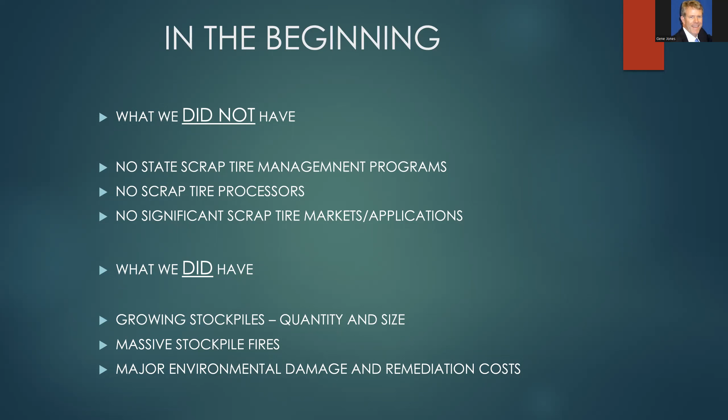So when we had the fires, that prompted Minnesota to develop the first scrap tire management program, and they banned scrap tires from disposal in stockpiles. Smart move on Minnesota's part. But then Minnesota's tires were transported across the border into neighboring Wisconsin, into massive stockpiles that then had fires. So Wisconsin then banned stockpiles. I think you're getting a feeling for the gradual progression. Everybody basically had to initiate waste tire management programs in self-defense. Next slide, please.

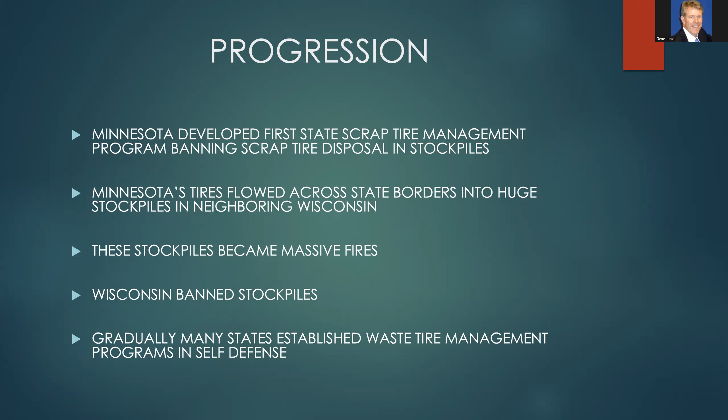So that led to Florida developing a program. They started in 1987, and they didn't just try to do something quickly. They carefully evaluated objectives, components, and the experience, good and bad, of others. It was during that gathering that Jan Clark contacted me because we had experience in waste recovery, we saw what other states were doing, and we could give her a feeling for what impact it would have on processors and being able to encourage them.

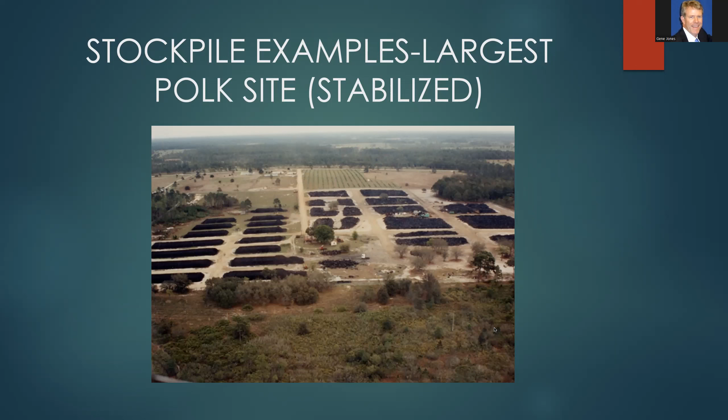And this site was particularly problematic because it sat right on sandy soil right above a major aquifer recharge zone. And if the fire created pyrolytic oils that went down through the sand and into that aquifer, the impact on Florida could be substantial. Next slide, please. So big piles, little piles, spread all over the place. Next slide, please.

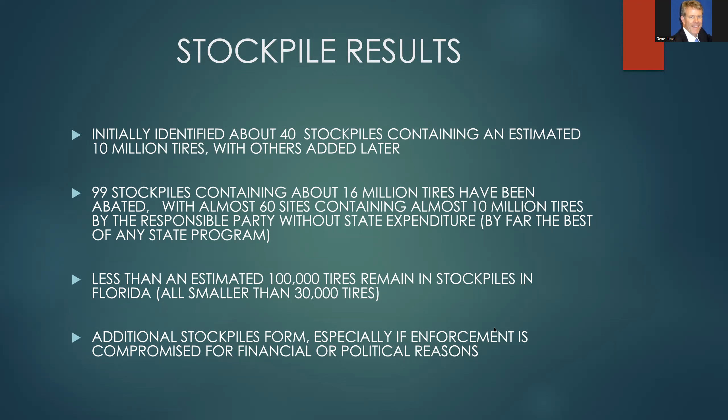So the next thing that Florida had to do was you had to deal with the stockpiles, then you had to manage ongoing generations so that you didn't create more stockpiles. And Hope dealt with some of these things, but I'll just go through them quickly. Critical parts were to register or permit all segments of the tire handling chain, from tire stores to haulers to processors to disposal sites. Established operating parameters and monitored conformance, a continuing battle. And the important part was they enforced violation penalties. Some people even went to jail.

And equipment was seized. The whole rule was tied to the litter control rule that had the provisions in it allowing seizure of equipment. So it's one thing for a person hauling tires in their pickup to dump them when they might get their wrist slapped, but if somebody was going to take away their truck, that got their attention. The objective was to minimize stockpiles by increasing the probability of being caught with good oversight and having penalties greater than the savings that the person would achieve by violating the law. Florida has a good history, but budget and experienced manpower limitations can be a challenge.

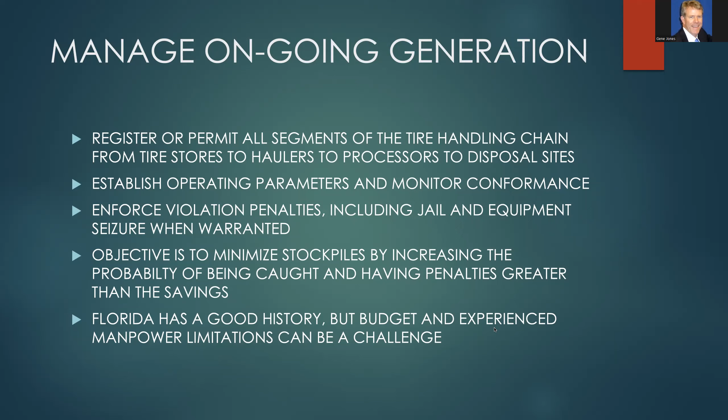Florida did some things in its initial program development that were really wise. One of them was they required tires to be cut into at least 8 roughly equal pieces or shredded prior to landfill disposal. Now that reduced the volume and it improved landfill space utilization, but a side effect of it was that it increased the cost associated with disposal and increased the driving force to create markets.

Florida also used grants to counties. At the beginning, they gave grants to all counties, large and small. It's evolved now into only going to small counties. But they were used to promote applications like playground cover and product purchases. And they even set up a mechanism so that the state reviewed some of these products, approved them, and made them easier for the county to purchase. There were a lot of phantoms out there and scams. Florida recognized that markets had to be diverse, and it developed a strategy to encourage these multiple markets. They've had an outstanding success rate, but markets change constantly and require continuing development.

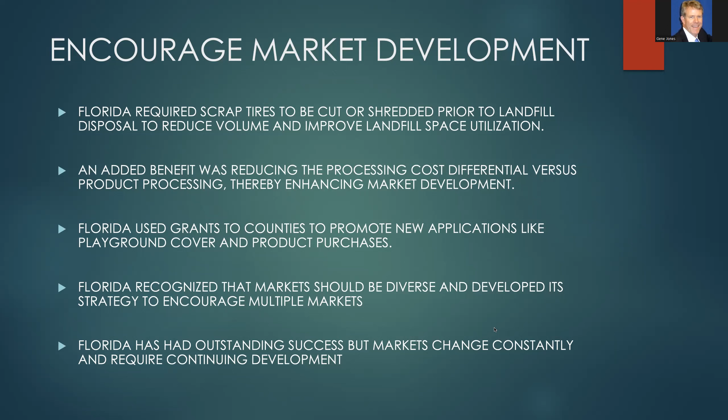So I'm going to go through these market segments briefly, and in following sessions, you'll hear more about it from the panels. So I'm only going to go very quick. TDF for years was the largest market. It's the market we worked to develop in waste recovery because it was large and didn't require particularly sophisticated processing, at least compared to crumb rubber and some of the others. And TDF offers environmental and operational advantages versus coal, including lower greenhouse gas generation, and it has a renewable resource component from the natural rubber that's in it. And there's less landfill usage because it has a lower ash content than most coal. So that's the end of the ad for TDF, but it is a very good fuel. It's not a forced fit.

So major usage in Florida includes multiple cement kilns. Their usage depends on market and operating conditions. As John mentioned earlier, sometimes when the business climate is strong and construction is strong, they optimize production, and that requires them to just focus. They want to simplify things, and they simplify their fuel mix as part of that.

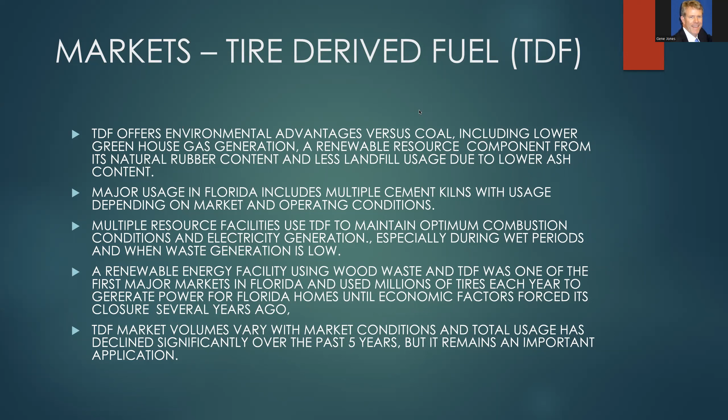Rubber modified asphalt is a term that, if you've worked with scrap tires at all, has been heralded as what was going to use all of the tires, going all the way back to ISTEA, the Intermodal Surface Transportation Efficiency Act of 1991, which was going to require the use of rubber in all highways in the whole world, or at least in the United States. But Florida has used more rubber modified asphalt than any other state except California and possibly Arizona. It pioneered terminal blending along with Mike Rouse and some really good people in Florida DOT. They developed this technology that has since been broadly used across the country.

Florida DOT is the only state to specify rubber modified asphalt in all high traffic road maintenance for many years. At its peak, RMA consumed about 10% of the waste tires generated in Florida. However, styrene block polymers, primary products produced by major companies, have come in and displaced rubber modified asphalt in Florida. So there's virtually no usage. However, there's some new dry process technology, two variations of it, that are now being demonstrated around the country, and they have the chance of rejuvenating this market by offering lower price and similar performance, and be able to compete effectively against the block polymers. Next slide, please.

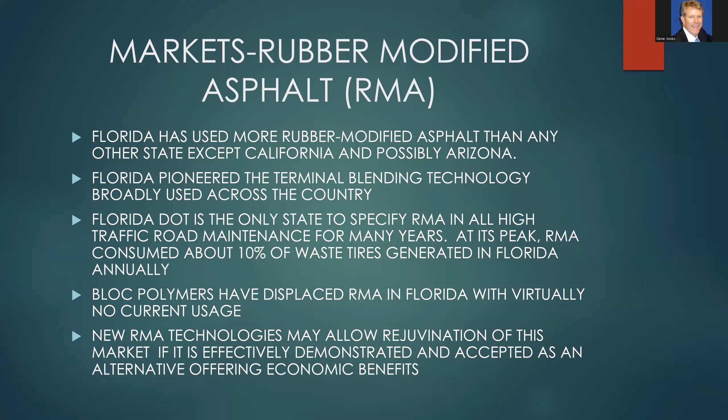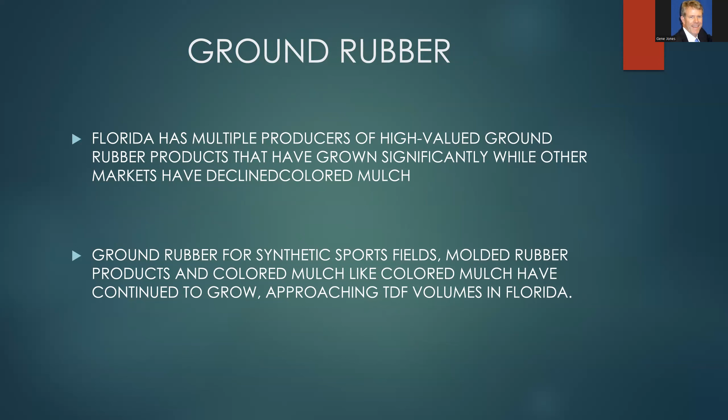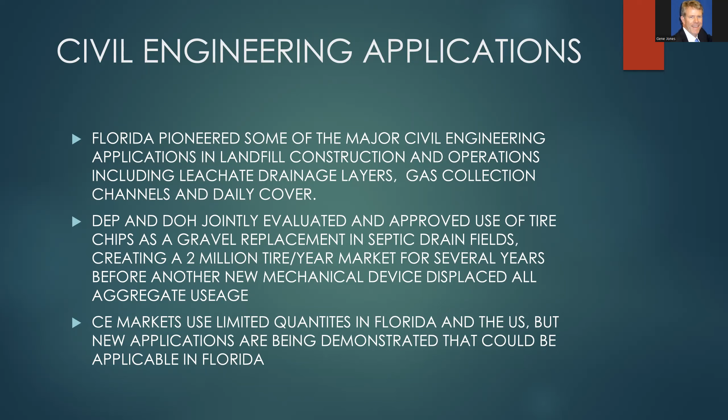So just for overall perspective, Florida's scrap tire management program has been and continues to be fundamentally sound. It has multiple major producers and a broad market base. We're doing a detailed market analysis now, and the preliminary data suggest that overall usage level has declined significantly from about 93% 5 years ago to about 70% now, or in 2022. But it's still comparable to the national average that John discussed earlier.

One critical point is that no market development has been done in Florida for over 5 years. And depending on final results of the market analysis, it may be appropriate to consider future market development efforts to increase the usage of this valuable resource. Next slide, please.